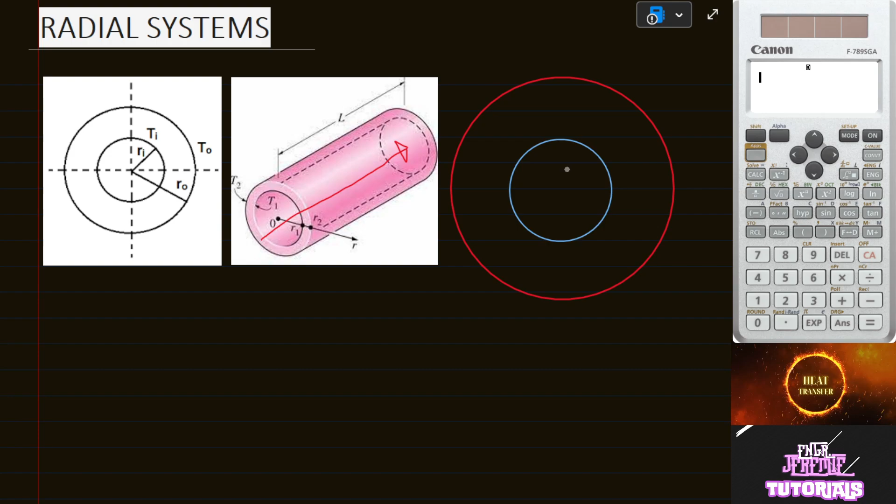So if we look inside, since there's hot fluid inside, it heats up, let's call it T1. And then this also heats up or has a temperature, let's assign it as T2, where in our analysis, T1 is greater than T2. So since T1 is hotter, the tendency is heat will flow from inner to outer, since it's hotter inside than outside.

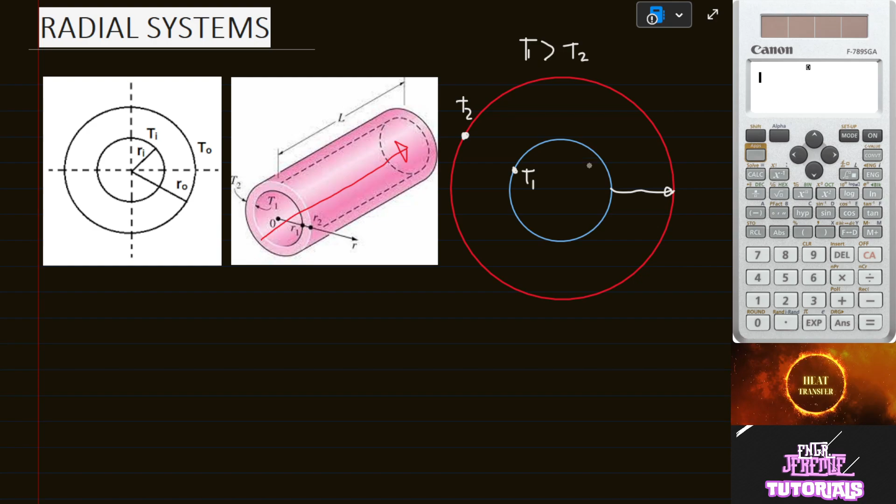Next, let's consider the radius. Let's start with the smaller radius, assign it as R inside. And then the radius of the outside, let's consider it as radius outside.

For this type of conduction, for our governing equation, we use Fourier's law of heat conduction, introduced to us by Joseph Fourier. So we will use Fourier's law of heat conduction again.

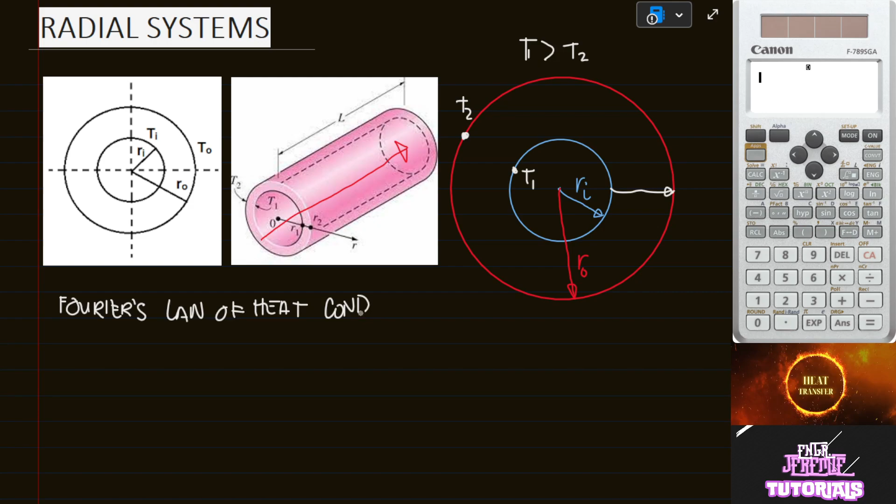Ano ang i-state doon? Ang sabi doon, the rate of heat transfer is directly proportional to the negative gradient of the temperature and its area. Yun yung sa conduction. Yun yung general equation, so we derived it as negative.

Ka dt over dx. But this is for plane wall. Wala na tayo sa plane wall, we are now in radial systems, so magkakaroon ng variation yung formula na ito.

Instead na wall, instead na dx yung naandyan, since wala tayong thickness ng wall, meron tayong difference in radius. Meron tayong difference in radius. Imagine niyo itong pipe na ito, imagine this pipe.

Itong pipe na ito, hatiin natin dito, sa taas, diyan sa part na yan. And then ilalatag natin sa flat surface. Pag hinati natin ito dito, sa taas, and then ilatag natin siya sa flat surface, magiging ganyan siya, yung itsura niya.

Yung nasa loob, itong nandito sa baba, nandito yung T1 natin, nandito yung T2 natin. So ito kumbaga pabilog, pabilog. Hinati natin dito, tapos inilatag natin papunta doon. Tapos ito naman nilatag natin papunta dito. So parang magiging ganyan yung analyzation natin.

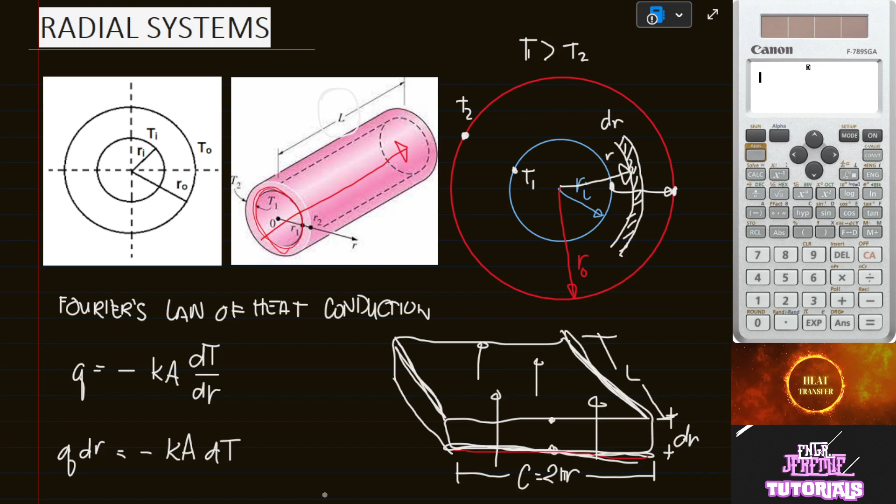Area lang yan ng surface area ng cylinder. Ano yung surface area ng cylinder? That is equal to 2 pi r times yung length ng L natin, 2 pi r times length, o kaya yung length times width, which is equivalent sa circumference. So therefore, itong area dito, that is equal to 2 pi r times L. So palitan natin yan.

Q dr is equal to negative k. Yung area, palitan natin ng 2 pi r L, since yun yung area na na-derive natin dito, times the differential in temperature.

Next, pansinin natin yung ating mga variables. Ang differential of r natin dito is in terms of radius, at meron din tayong radius dito. So pwede natin, ang rule dito, we combine those variables para ma-integrate natin siya. Kumbaga yung R dito dalhin natin sa kabila, we divide both sides by R, kaya magiging Q dr over R is equal to negative, unahin ko na yung 2 pi k L dt.

Negative 2 pi k L dt. Nawala na yung R, since yung R napunta na dito sa kabilang side. And then, what are we gonna do next? We will integrate both sides.

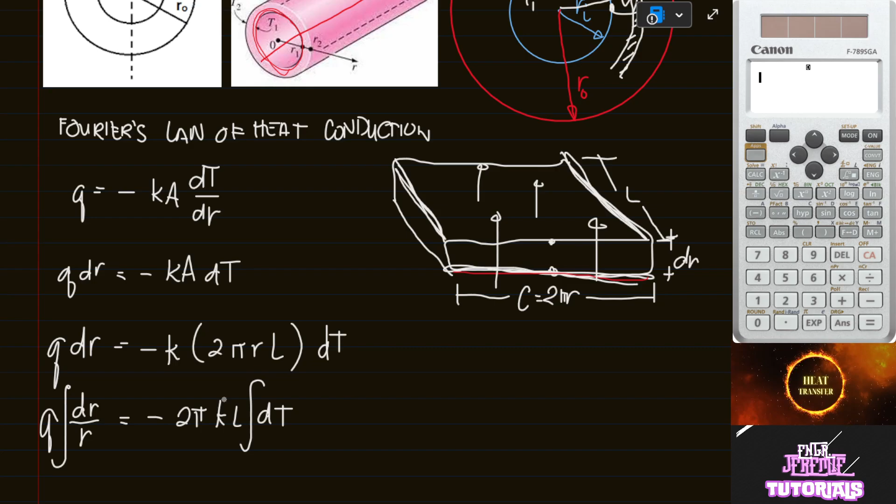These are all constant since ang variable natin is t. Q is also constant since ang variable natin is r. Okay, so next is to determine ano nga ba yung limits.

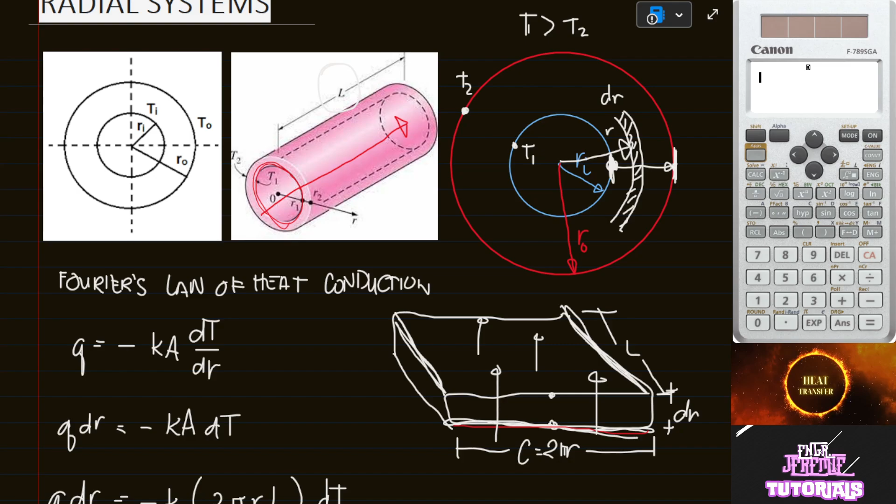Simula tayo sa temperature. Kung yung Q natin is from here hanggang rito, yan yung mga limits na kukunan natin. Ano yung temperature na nagtatouch dito? That is Ti or T1, temperature inside. At yung nandito is temperature outside o T2. So pwede natin ilagay na mag-start sa T1 papunta sa T2, or temperature outside of the pipe.

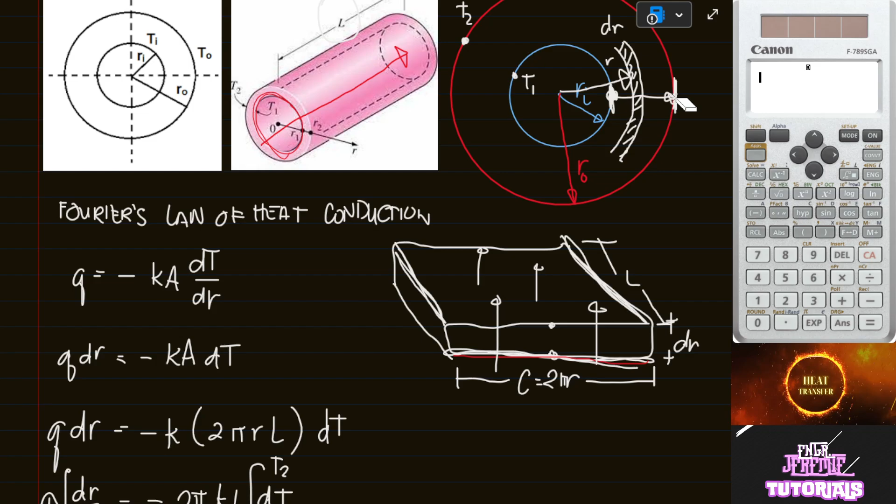Ngayon, ano naman yung radius? Kung papansinin nyo, yung radius nito, yan, that is equivalent to Ri o radius inside ng pipe. At yung radius outside ay nandito sa part na to. So from radius inside to radius outside. Yun din yung limit nung sa radius natin, from Ri to Ro.

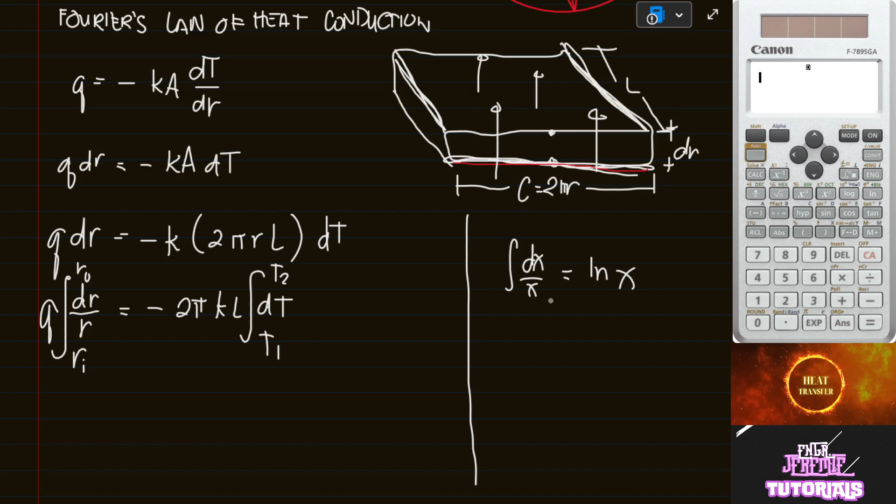Let's evaluate those integrals. Kung naalala natin sa integral calculus, the integral of dx over x, di ba, that is equivalent to ln of x? So meron tayong integral of dr over r. Pag in-integrate natin yan, magkakaroon tayo ng Q times ln of r.

Limit is from Ri to Ro. That is equal to negative 2 pi kL times t, kasi ang integral ng dt ay t na lang. Limit natin from T1 to T2.

Substitute natin yung mga limits na yan. Q times ln, upper limit, ln of Ro, o yung outside radius natin, minus ln of radius inside. Upper limit minus lower limit. So that is equal to negative 2 pi kL. How about the t? Upper limit na T2 minus lower limit T1.

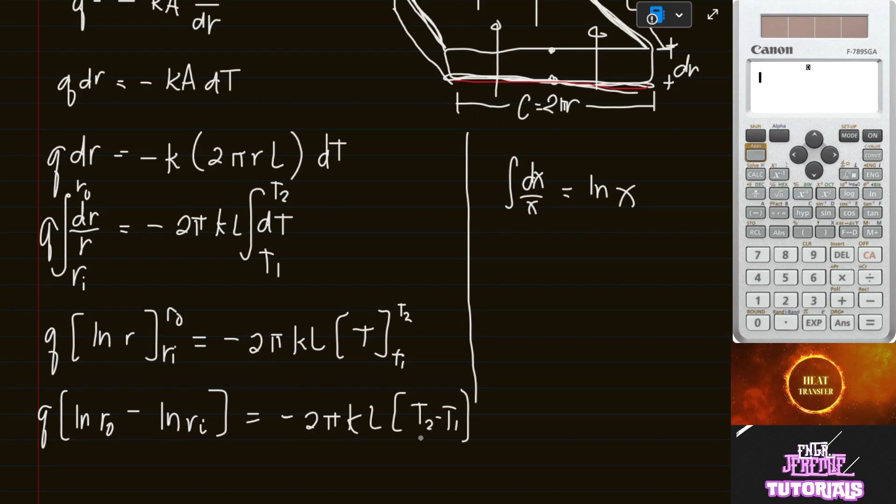Okay, so ito muna. Sabi natin dun sa conduction, para ma-eliminate itong negative na to, pwedeng pagpalitin natin ng pwesto itong dalawa, yung temperature. Na-prove na natin ito dun sa plane wall. So to eliminate this, pagpalitin natin yan, since sabi natin T1 is greater than T2. Kasi magne-negative to eh, so baliktarin na lang natin para ma-eliminate natin yung negative na yan.

So Q times ln of Ro minus ln of Ri, that is equal to, alisin na natin yung negative, 2 pi kL, pagpalitin natin ng pwesto to, T1 minus T2. Okay, balik tayo sa algebra.

Sa algebra, sa rules of logarithm, alam natin that the ln of A minus ln of B, that is equal to the ratio of ln of A over B. Yan yung rule natin sa algebra. Ln of A minus ln of B is equal to ln of A over B. So pwede natin i-apply siya dito sa rule of logarithms.

So therefore, ang mangyayari, magiging Q times the ln of, yung A natin is Ro, yan yung nauuna, over Ri, that is equal to 2 pi kL, T1 or Ti, minus T2.

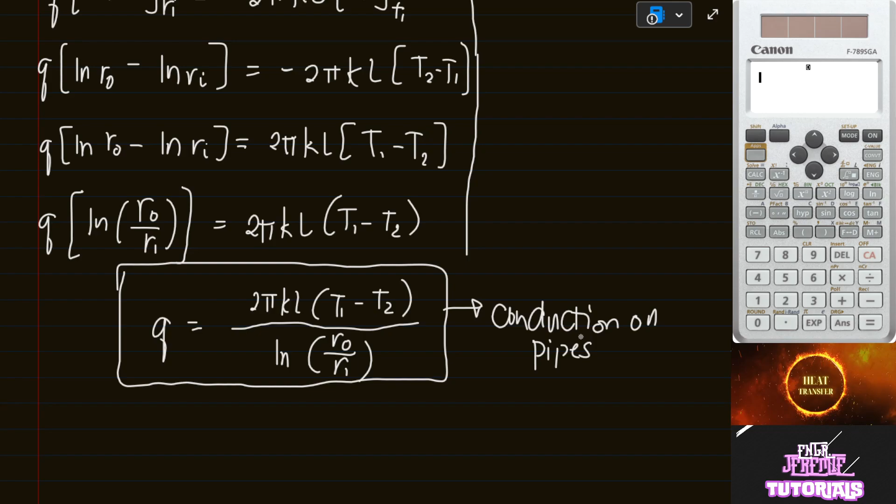We can also rewrite this formula in the form na Q is equal to delta T over the thermal resistance. Diba? Pwede natin gawin yun. Iwan lang natin itong delta T sa taas. Q is equal to yung delta T sa taas na T1 minus T2.

All over, ito muna, ln of Ro over Ri, all over itong 2 pi kL, dalhin natin sa ilalim, 2 pi kL. So this is another formula natin for heat conduction on pipes.

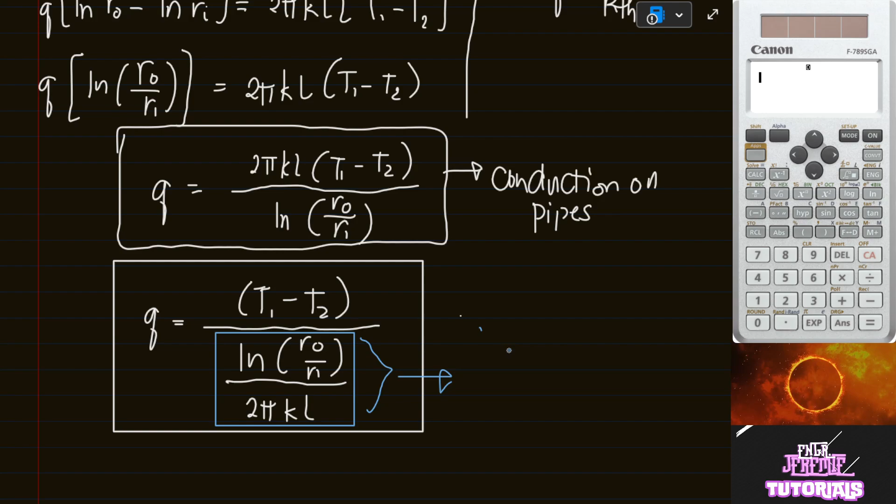Ngayon, itong nandito sa baba, this one, that ln Ro over Ri over 2 pi kL, yung nandyan sa baba, kung papansinin nyo, alin na to? Ito na yung thermal resistance natin by conduction for pipes. Okay? Thermal resistance by conduction dun sa pipes natin, ln Ro over Ri all over 2 pi.

So wag kakalimutan yung formula na yan since yan ang gagamitin natin once na mag-analyze na tayo ng multiple pipes. So that concludes our discussion for thermal resistance by single pipe. Kindly click the next video for another discussion naman on conduction on multiple pipes.